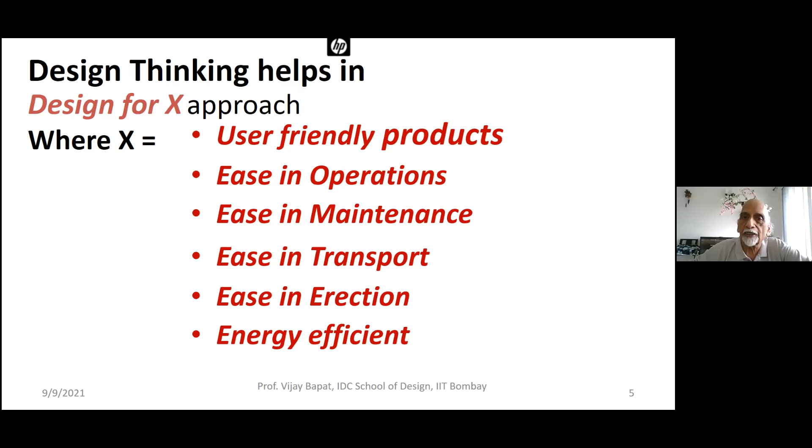So I look at the design thinking process as a very disciplined search for creative ways to do things better, different, and in more effective ways. We work on existing products or new products, but we try to make it better, different, and more effective. Only then is it innovation, and then it is patentable.

And why is it becoming so important today? Because of globalization. And another new trend is e-marketing. Now I can sit in any corner of the world with the click of a button. I can see products available in some remote village in Africa, and maybe with e-marketing I can even order that. It's possible today - the world has become a global village. We know what is available everywhere, and I can procure that also.

Now, I'm very proud that in recent years, the middle income group's earning is increasing. And what does that mean? There is some money available now for them after spending on roti, kapda, makan - the basic necessities - on things of desire. Now I would like to buy a better TV, better mobile, better car, better chappals, better clothing - everything, better. These are desires now, no more just necessities.

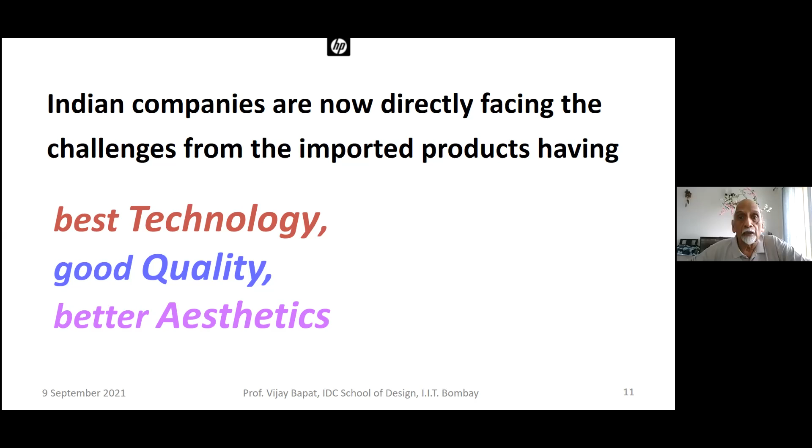India is fast emerging as one of the largest markets in the world. So what's happening actually? Indian companies are facing real challenges, new challenges. We are facing competition from imported products, which have the best technology, built with the best quality and even better aesthetics.

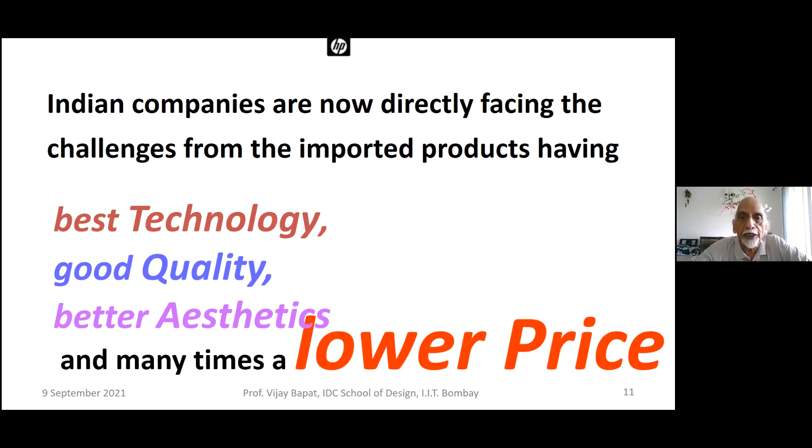So now we can actually make a statement that if another Mahatma starts another Swadeshi movement, it will not be effective because my Indian buyer is very intelligent now. He will say, okay, I have 100 rupees to offer for this product. Other companies are offering me all this added value, added characteristics. If you also offer it, definitely I will go for the Indian product.

Actually, another very interesting thing is happening. In 2019, our PM Narendra Modi envisioned that India will become a 5 trillion economy by our platinum jubilee. It's fantastic, and his dream is to make us a global powerhouse. So how can we achieve that? One important aspect is export of user-friendly products and services, which can play a very important role in achieving this dream.

Atmanirbhar Bharat, a very fantastic term he has started using in all his speeches. So we are saying we want to reduce imports and also increase exports. And that will be possible because at the central government level, they have identified almost 500,000 hectares of land for foreign companies. They are making many easier rules to do business.

Nine new ministries are in the pipeline to boost manufacturing, and one very interesting ministry is the Ministry for Innovation.

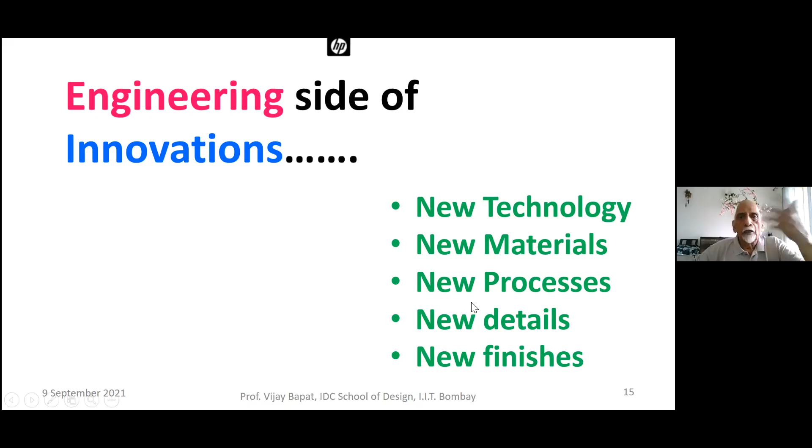Most of the time, the engineering side of innovation deals with new technologies, new materials, new processes, new details, which are important. But I also feel this will lead to very interesting new outcomes - we can reduce the cost, we can introduce new materials, new finishing.

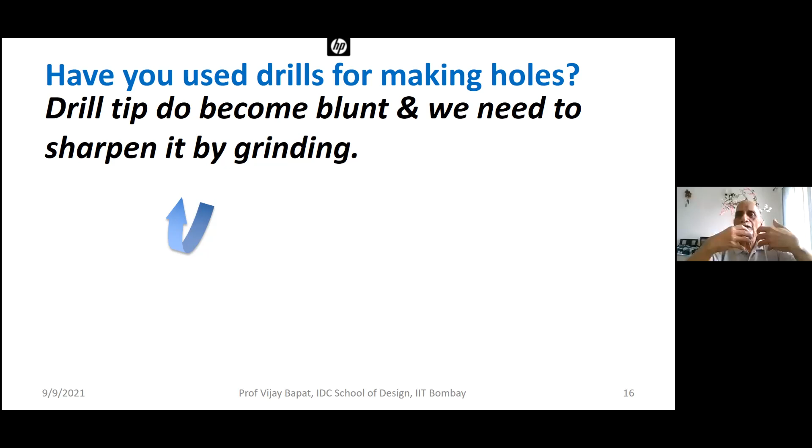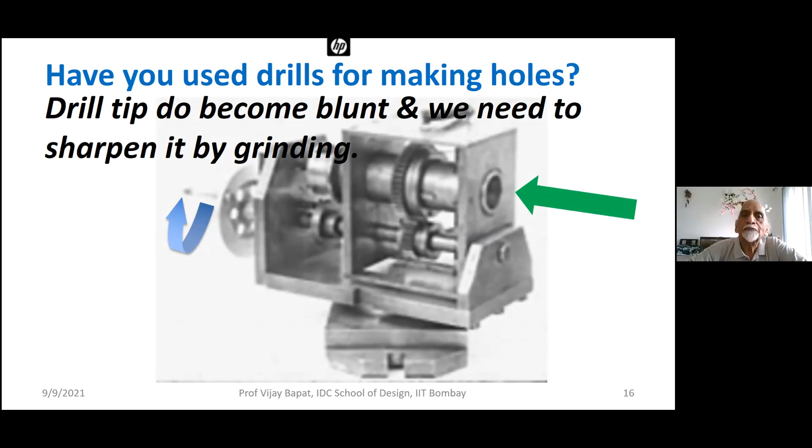We all must have used the twist drill for making holes in metal, wood, and all that. This drill tip does become blunt, so we need to grind it. So my mechanical friends designed a very interesting system where there is a gear system, a crank, and a morse taper where I can insert the drill and mount it on the pedestal grinder. As the angle is set, I just rotate the wheel and I get a perfectly sharpened drill tip.

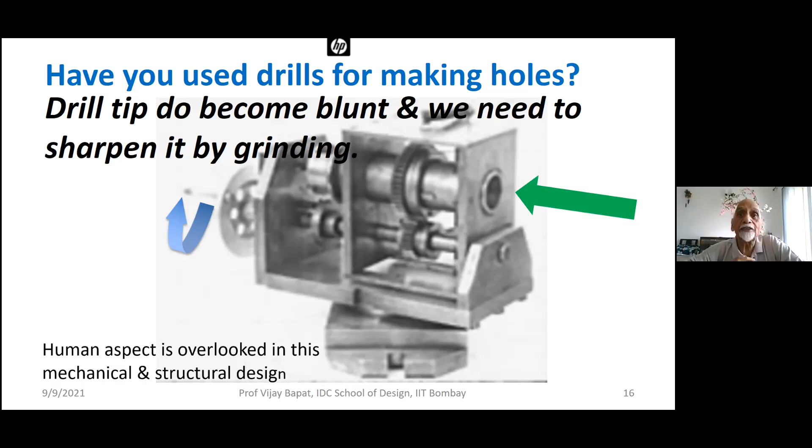Fantastic. But if you really ask me, this whole innovation is done overlooking the structural design and even the human aspect. Structural design means, is it really easy to assemble, easy to manufacture, and all those aspects. So it's a wonderful innovation, but I'm afraid it is not sellable in the market.

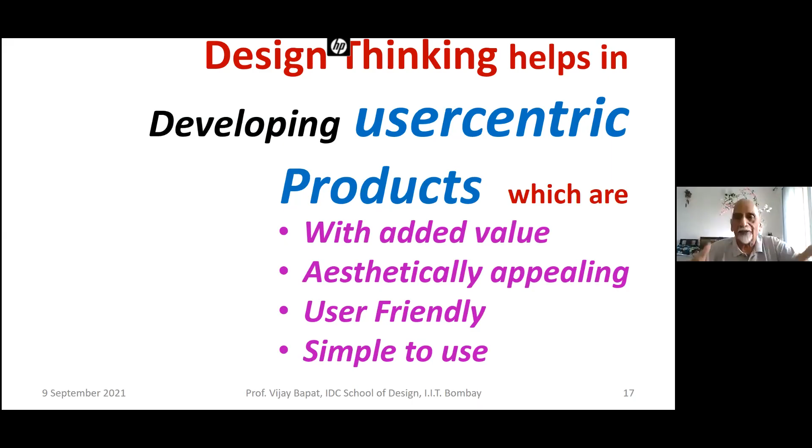Design thinking helps in developing user-centric products which have added value. They are aesthetically appealing, user-friendly. I don't need a very elaborate 100-page manual for that, and they are very simple to use, intuitive to use. You look at the product and you feel, yes, I can use it without really reading the manual.

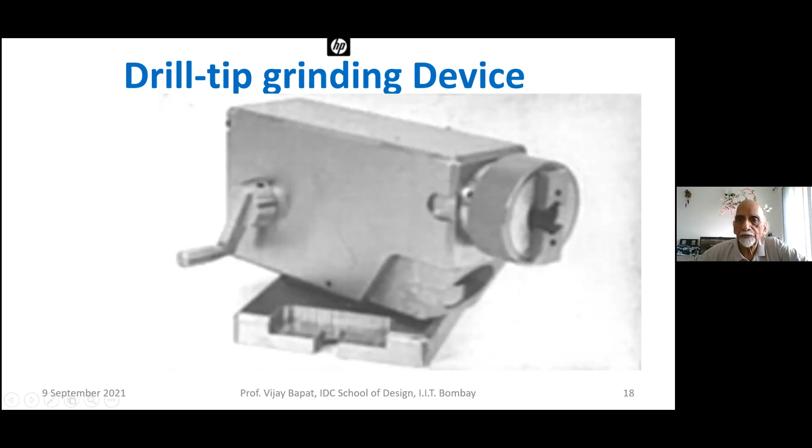So I'm referring to a coin, where technology and design - the user-centric aspect - are two sides of the coin. And we know that if both sides are not there, then it is like Badda Rupaya, and Amitabh Bachchan can use it only in Sholay. So to make the product successful, technology is equally important, and the user-centric approach is important. Our design thinking approach will help us develop products which will satisfy the user.

I'm taking very simple products which are available in the market, and I'm elaborating how design thinking has helped us develop better products. First, adhesive tape for medical application. Let me talk about the adhesive tape first.

We all use this cello tape. It's a wonderful product, and I can just cut a piece. But is it really user-friendly? No. There are many breakdowns or problems when we use it. We have to use either a cutter or scissors, and if it is without a dispenser in this form, you have to use your nail to locate the starting point.

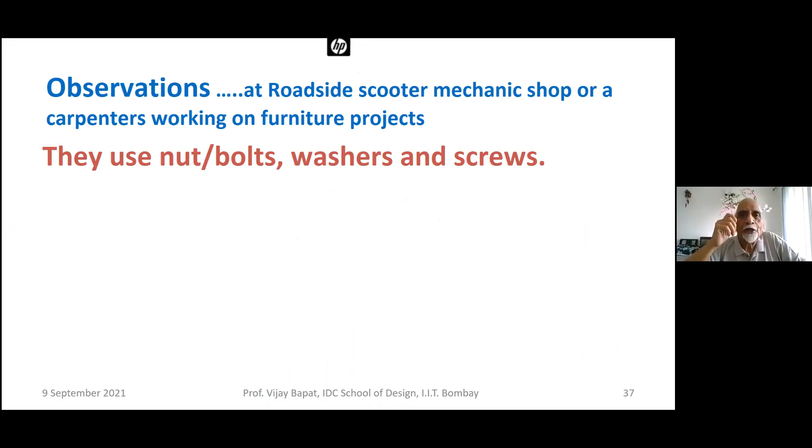Let me elaborate on the power of design thinking again with another example, presented in story form. I observed that roadside scooter mechanics or carpenters, when working on a furniture project, use nuts, bolts, washers and screws. We all know the washer is very important, but it looks designed for dropping. It is such a tiny product, very important in engineering function, but so tiny to handle. So my observation: they use a screwdriver with a magnetic tip to lift this dropped product.

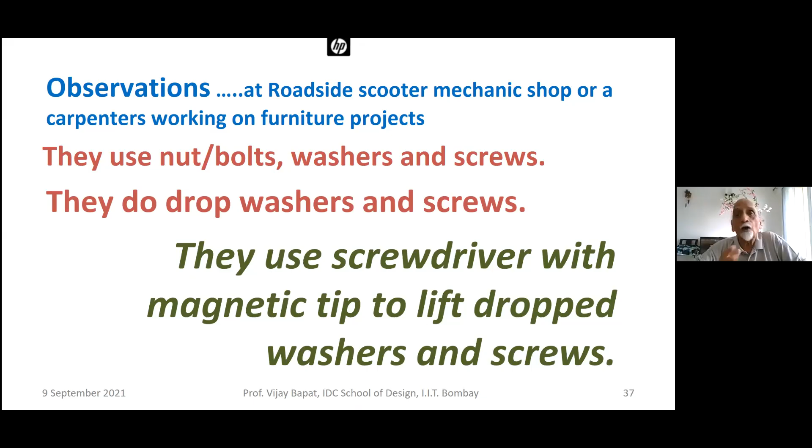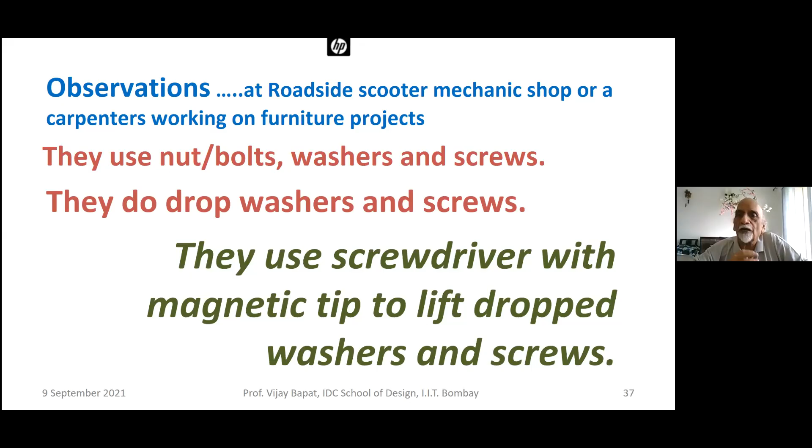We all know from 6th-7th standard that magnets attract ferrous things. Converting that principle, carpenters and mechanics have converted their screwdriver into a lifting device. Fantastic. But when you look at the magnetic tip screwdriver, it's not compact. It's not sellable as a product to other people. Maybe only carpenters, mechanics, or technical people will buy this, because it's not compact.

Now let me present another scenario. Say I'm an old man trying to open my door. Thanks to my lock manufacturers, the keyhole is always very tiny, so I struggle to insert my key. Thanks to my interior decorators and architect, the lamp or lighting always throws the shadow of my own body onto the keyhole, making my life more difficult.

If I'm really old, there might be onset of Parkinson's, my hands might be shaking, and I might drop the keys. With old age, there might also be problems with the back - I can't bend quickly. Can I develop some very compact product for this problem? Yes, I can. So I thought of developing a very compact product - like an innovation - I attached a permanent magnet on a thread.

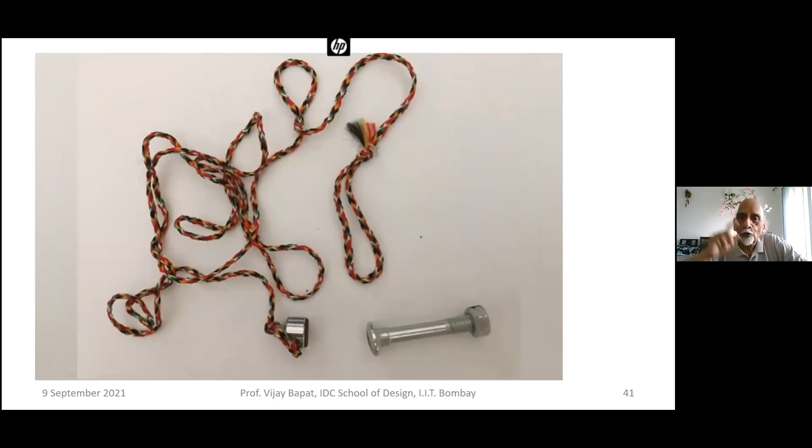I can carry it in my pocket and use it for lifting dropped keys or anything. Fantastic - now I have solved the problem for myself. This is my innovative device. I can wrap the thread, there is a loop, so I can hold it on my finger, put it on, and lift the dropped object or my keys. Fantastic.

But you agree it looks like a jugaad? My friend, do you agree? So this product is not really sellable. For the last 20 years or plus, I've tried to offer it on this type of platform and sell it, but nobody has offered me more than 5 rupees. Why? Because of that jugaad look - people feel why should I buy it from Professor Bapat. The IIT brand is not helping me market it.

So this product is a wonderful product, very compact, but there is a lack of human-centric design approach. It doesn't look like a value-added product - it looks like a jugaad.

Can you see I'm carrying one product in my pocket? This product is like having a clip, and it's nothing but a small, powerful magnet fixed on the tip of the aerial. Wow - doesn't design thinking lead to fantastic innovation? It's compact, carryable in my pocket, respectable to carry, and allows me to lift a dropped product. Very, very interesting product.

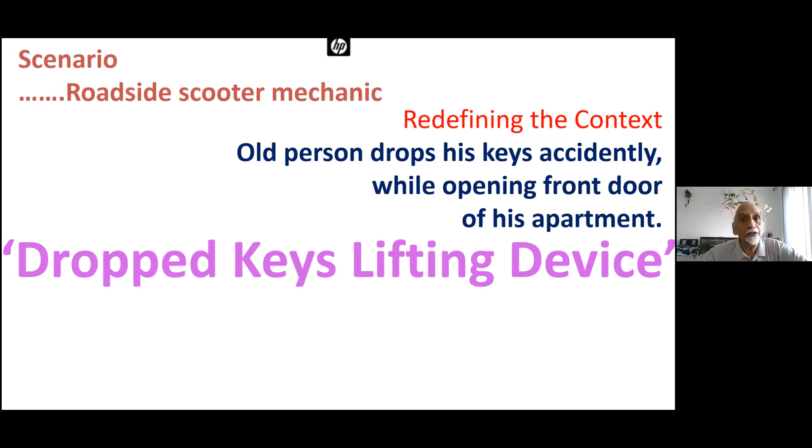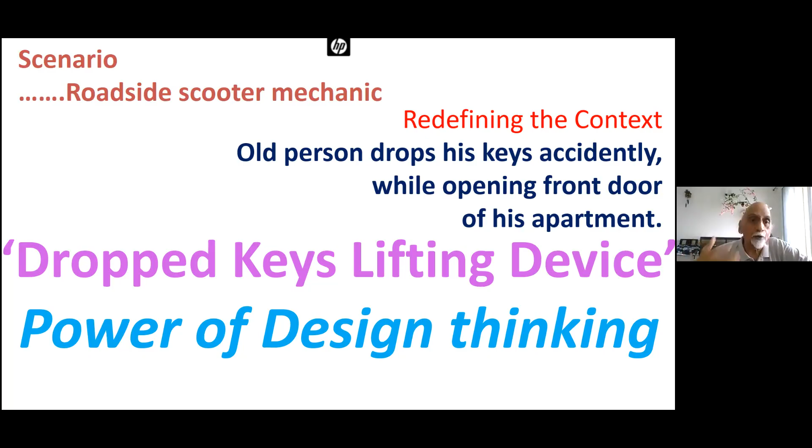In fact, I purchased this in a department store, particularly in the US, where there's a section for aged people, because demographically most Americans are older rather than young, while in India we have more young people. So maybe this product will not sell in India, but it's designed for the US market where countries have a larger older population.

Now we have started talking about user-centric design, which helps me develop fantastic products. Now I'm elaborating on the user. I'm user... you're bombarded with this, and design thinking, yes. Further, I'm going into details of user. They can be divided into 3 groups: primary, secondary, tertiary.

To explain this term better, I'm using the domestic mixer and grinder, a very typical product common today in our homes. Even in villages, now that power is there, people have started using this mixer and grinder because it makes life comfortable for wives doing very extensive cooking, whose life is drudgery otherwise.

If we have to manage the kitchen, my God, it's a real problem for me, all-day kitchen management. So who is the primary user? My wife. She uses the mixer and grinder for making chutney and all that.

Now, as I'm staying in Bombay, space is very expensive, almost starting at 50,000 plus per square foot. My kitchens are very small, I have a very small kitchen platform.

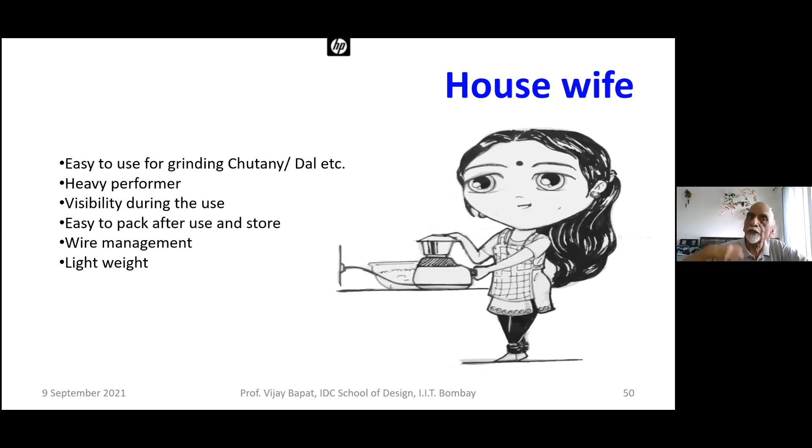So if my wife has used the grinder for making garlic chutney, she keeps the bowl for cleaning by my maid servant. So the maid servant is also a user now.

Okay, so what are her requirements? It should be very easy to dismantle the blades, easy to clean, with fewer parts. Why easy to dismantle the blades? Because below the cutting blades there are niches and crevices which are most difficult to clean. So the chutney jar, if it is to be cleaned, she has to open it up. In half a second she should do half a minute's work. Isn't it demanding? And maybe my maid servant is illiterate, and that's why she is a maid servant.

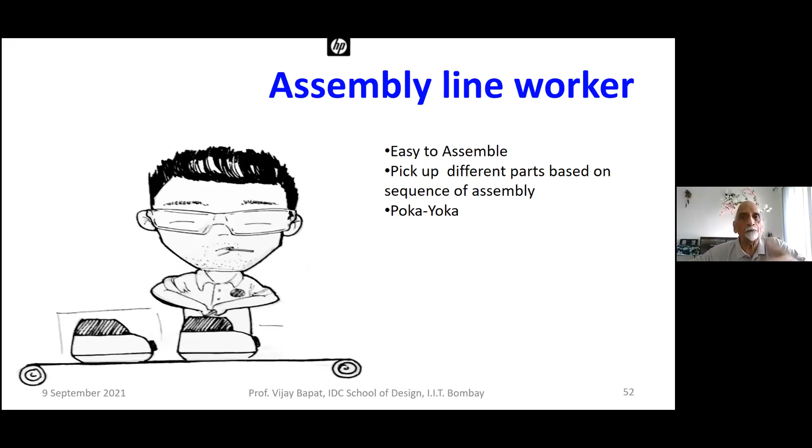Assembly line worker, him or her in the electronics industry - it's female dominated because they can do very repetitive, persistent, micro level jobs. Sometimes we use a microscope for assembly. It should be easy to assemble, pick up different parts based on sequence of assembly. Poka yoke, of course, in engineering teaching we talk about poka yoke, design for poka yoke, thanks to Japanese industry. So that every time a worker is assembling it, it's in the right way. All parts must be designed for the poka yoke principle.

Even in transportation, transport and workers, because in India we are still far away from automation, like loading and unloading trucks. It should be very easy to lift, pass on, and load in the truck. It should maximize loading in the vehicle. So size - if it's a 3-tonner LCV or a 10-tonner or a big container - that size becomes very important when I'm deciding the unit pack, or it helps me decide what should be the size of my mixer and grinder.

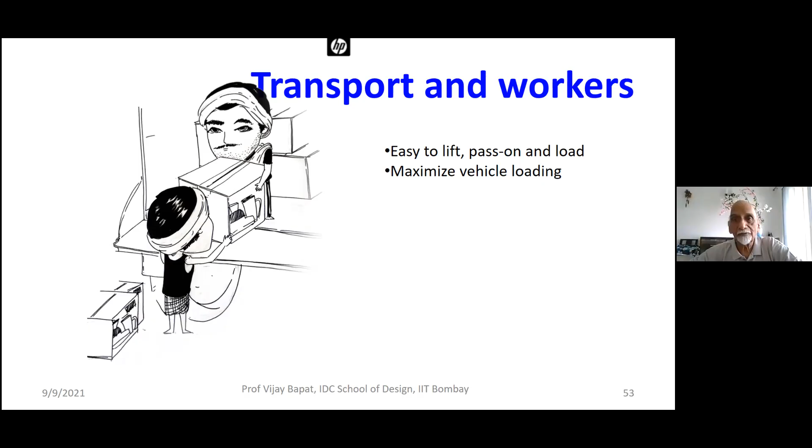All products - we don't believe in that Western approach of use and throw. So we like to maintain these. These are not small products - I am spending 3,000, 5,000 rupees for my mixer and grinder. So if it stops working, I'm going to either call a mechanic. Of course for bigger machines, white goods, the service mechanic will visit your home. For mixer and grinder, maybe I have to take it to the repair shop. But he is a user too - it should be very easy to diagnose the problem, easy to dismantle, easy to replace parts, easy to assemble.

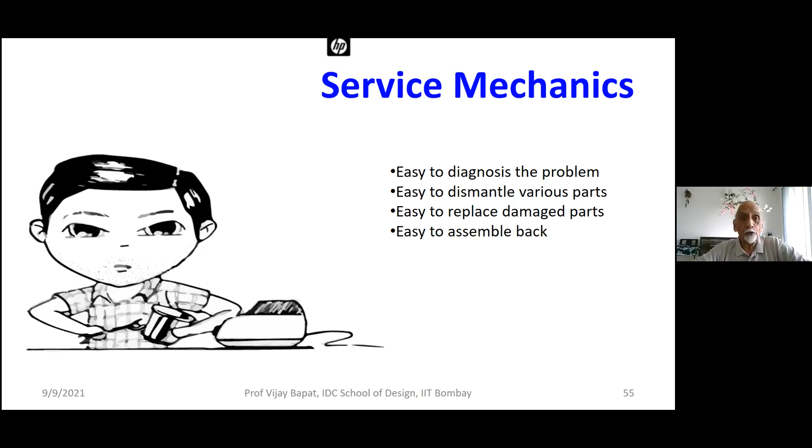Even to that extent, at the end of the product life - we Indians should actually be proud about this philosophy. We should not be ashamed of it, in today's green world of reducing carbon footprint and all that. The world is looking at India where this kabadiwala concept exists. I don't throw my old newspaper, I sell it to the kabadiwala. In turn he collects it and gives it for recycling. Fantastic. So even at the end of the life of the mixer and grinder, I'm going to sell it to the kabadiwala. Maybe he will offer 50 rupees, 100 rupees, whatever - he's the best judge to offer you money.

Now from his point of view, it should be very easy to dismantle, separate different parts based on material, because he would also like to separate the copper wire used in the winding of the motor, because copper can fetch real good value while the stamping is maybe only 10 rupees a kilo scrap value. Copper is about 300 rupees scrap value. He becomes my user and I have to design the product for him.

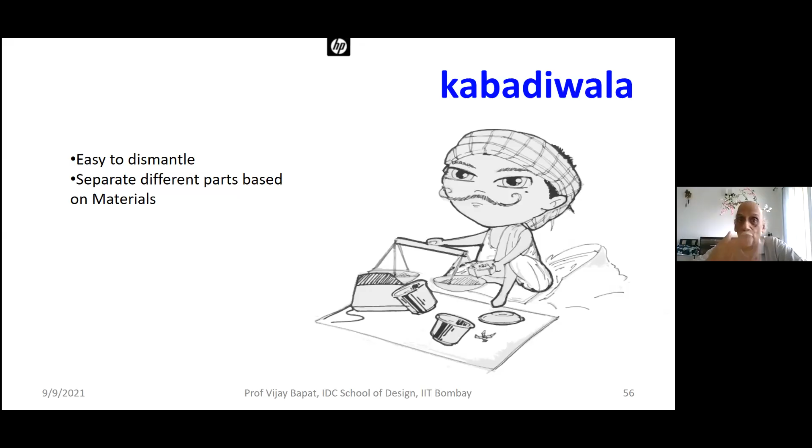Today the car manufacturers, the auto giants, have a design team working on new designs of a car, and there is an equally important group working on disassembly of cars. At the end of the life of a car, it should be very easy to disassemble. They are talking about automated disassembly and barcoding so that even ABS, styrene and PP - these plastics - can be separated. Automated machines can separate plastics, metals like aluminum and copper, and the kabadiwala too, because if we want to make our earth livable with green design and reducing carbon footprint, this becomes important. It's almost like a PLM approach - product life cycle management - and design thinking helps in this.

Designing from cradle to grave - I'm designing it from the user's point of view. All these users, when I say users are involved, design thinking is involved, then I start looking at different users. They are responsible at a cradle stage through to a grave stage.

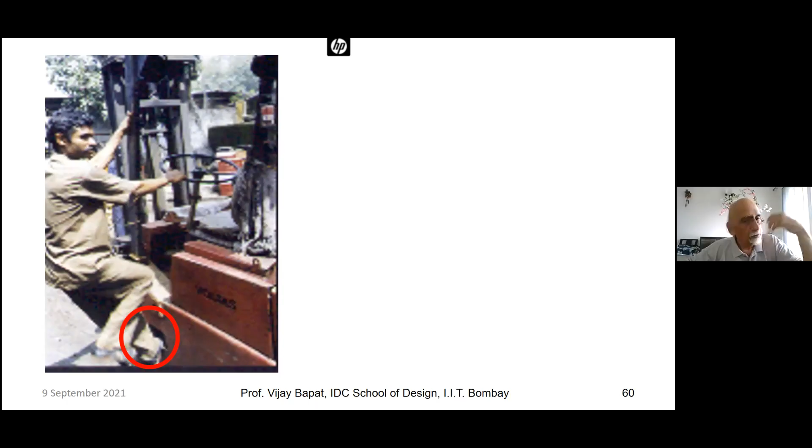And this driver is supposed to insert his toe—I'm referring to the toe part of the leg—into that step. You can very easily locate the step, insert the toe, and climb. Now on this forklift truck, there are no handles, so he uses the steering wheel and the basic forklift truck structure. Fantastic—he somehow manages to climb in. I'm using the term 'manages to climb in.'

Now he has to also climb down, and this is almost like a 90 centimeter, 3-feet-tall floor, and he has to jump.

When we talked to these drivers, they said they have to jump at least 20 to 30 times per day. Multiply that into 6 days a week, 52 weeks a year, and look at how many jumps per year they are making, jumping from 3 feet. These drivers are not athletes, they are not trained to jump.

Our spine and spinal cord is not designed for absorbing this type of jerk. The culprit, the crux of the problem for that backache, is this: almost every forklift truck driver was complaining within a year or so that backache starts. The problem is that small cutout in the sidewall. When he has to climb down, he's facing outward, and the step is not visible. Even if he manages the blind operation, the heel comes near the step. Can I insert the heel? No, it is designed for inserting the toe, not the heel.

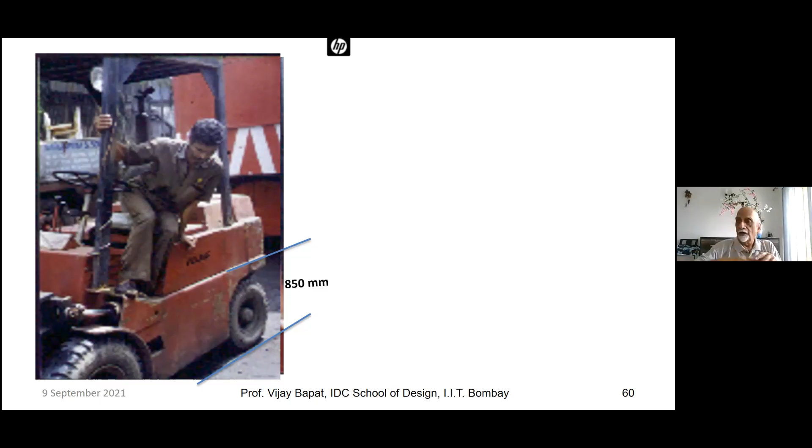So we said, this is the problem. We used design thinking as a process to solve it. How to solve this problem? We said we should create a step which is visible from the top, even when he is in the sitting position. So somehow we carved out a step.

We could reduce the distance from 850 to 450. Still it is tall, one can call it a tall step, but instead of jumping from 3 feet, this step can be used facing inward, and I can push my leg down just 1 foot, 40 centimeters, which is not impossible to get down from.

My drivers were really happy about this innovation, because after this we had to test its effectiveness, so we called some drivers. This is in IDC, we made a prototype, not a working mechanical prototype but a look-alike model, so a person could climb in and get down. We called some 10, 15 drivers and they said, fantastic, this is what is needed to get down. When he uses it every day for lifting heavy load, he has to get down 20 to 30 jumps, depending on what he is handling that day.

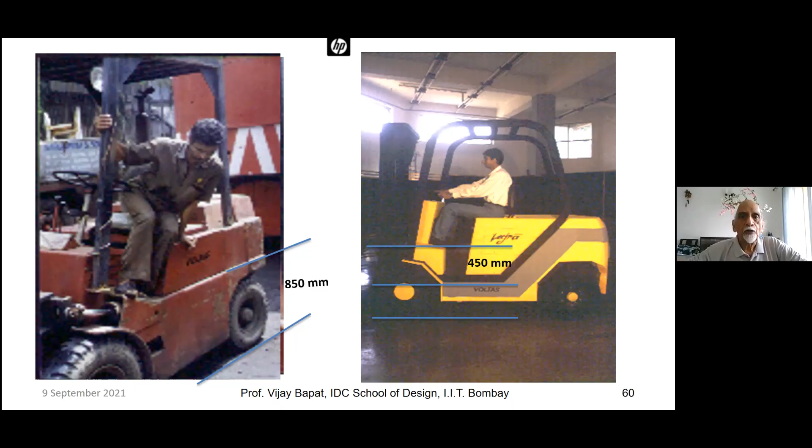As I was telling you, we spent 3 months understanding the existing design, where the user is even the assembly line worker, the service mechanic. We came out with 6 different chassis designs which can make their life comfortable and easy, easy to assemble, easy to maintain, easy to locate the problem.

But when we presented this to management, they said, sir, every design is fantastic, but it's like redesigning the whole truck, because we were proposing to change the basic chassis. These are concepts, not engineering designs, but design from the user's point of view, these are ideas. So they requested not to change the basic chassis, minimal changes only. Each design I could talk about for half an hour to elaborate why we developed it using design thinking. In some chassis designs there was less material and easier assembly, following that creative design approach.

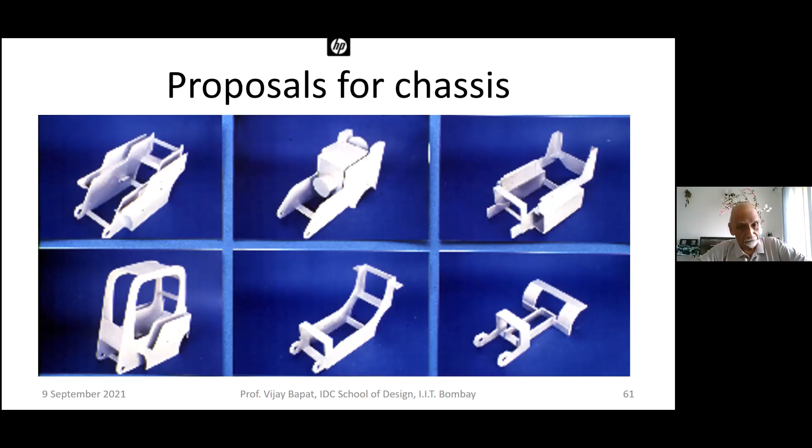So management requested minimal changes, it was like packing old wine in a new bottle. We accepted the challenge. We made those changes, and we made a full-scale thermocol model using 10mm, 20mm, 30mm thermocol sheets to explain to the assembly worker which plate and how the chassis is to be assembled. When they made the first modified chassis, they in fact used our thermocol model at the shop floor welding bay.

We designed it, our job was completed in '99. We submitted our proposal, and this whole model was shifted, this full-scale thermocol model built on their modified chassis. One of my designers was taken in by Voltas, and he worked on converting this into a working prototype. So it was tested, then there was a first engineering iteration and a second iteration. It was launched as the product Millennium in December 2000. It was a very proud moment for a designer, and even the Voltas R&D team, because it was looking great and really satisfying the need of a driver.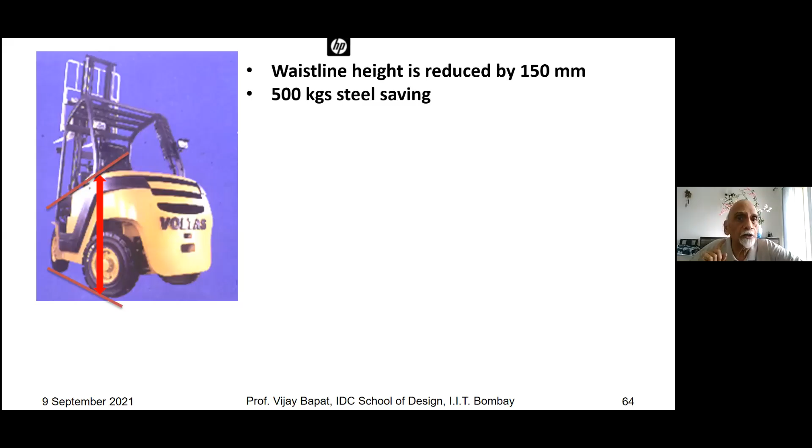It has now become lighter. Keeping the lifting capacity the same is important, so we manipulated a little on the balancing weight, but the lifting capacity remains the same. Still, the total saving on weight is 500 kg of steel.

Because now the basic load is less, dead weight is less, fuel efficiency has improved, speed has gone up, gradient performance improved, and this is becoming like a 5-star product. We all know AC, refrigerators and other electrical products - even in India we've started rating them, giving stars based on fuel efficiency and energy efficiency.

A 5-star rating gives you a really good energy efficient product, but you have to pay more, because it's like a saving per month in electricity for the lifetime of that product. Now if your dead weight is 500 kilo less, it's like using less diesel every month. So they started charging a premium on this - it is a 5-star rated product, one can call it.

They started exporting it. Actually, this division was in red, meaning they were not really making good profit because of the competition. But in one and a half years, because of export and increase in demand...

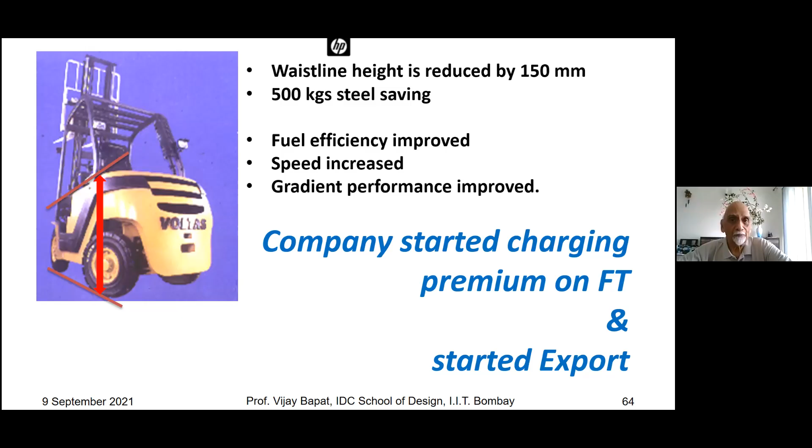I worked on another product, the cooler pump. Let me explain what this cooler pump is. Of course, in Bombay or similar climates near the seashore where humidity is high, desert coolers are useless, they don't work. But in many parts of India, like Rajasthan, Nagpur, Delhi and Haryana, it is dry climate away from the seashore, and desert coolers are very common.

Now, what we do in a desert cooler - it is 1/3 the cost compared to an air conditioner, where we use a compressor and freon gases, refrigerant gases.

Desert coolers have a small tank of water that we fill up. There is a small pump - when I switch on the desert cooler, this pump lifts the water and throws it on the pad, which we call the evaporation pad. There is a big blower behind that blows hot room temperature air. We normally put it near a window, so hot air comes in, the water evaporates, and that evaporation reduces the temperature so I get cold air. Fantastic product at 1/3 the cost.

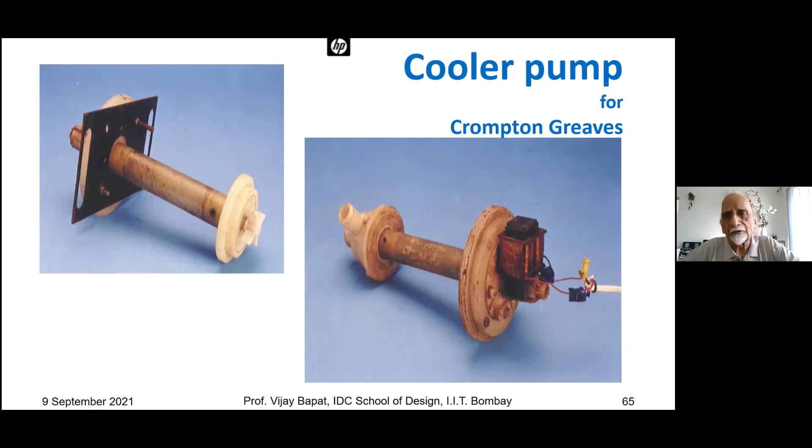So they presented, and we were happy because it is energy efficient. Compared to the induction motor, they had reduced the components by about 5 or 10%. Both of us said yes, fantastic research and innovation. Nori, our VP at that time, asked me, Professor Bapat, now from user point of view, design point of view, what is your comment? Using design thinking principle, I said, sir, fantastic, technically it is superb, but why is this designed like a 100 HP motor?

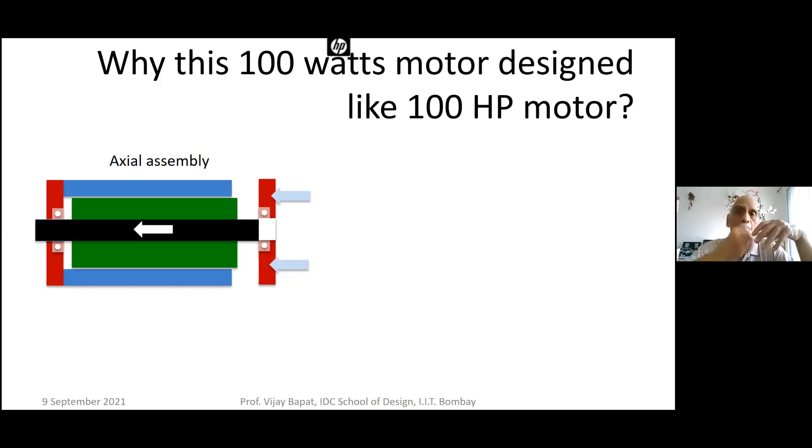Normally these bigger motors use axial assembly - there is a stator, blue indicates the stator, an end plate, a bearing, then I put the rotor in, then another end cap or cover. That's how axial assembly of a motor is done. I'm not showing the electrical thing, but mechanically the assembly is something like that. So I said, why is this 100-watt motor, a very tiny motor, designed like a 100 HP motor? He asked, can you elaborate? I said... and this was the sketch drawn during that meeting.

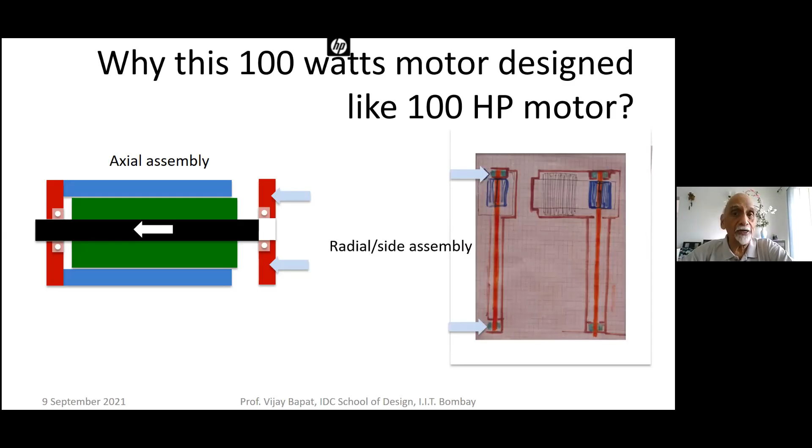I said, can we develop a motor based on radial or side assembly instead? They gave me the challenge - they said, with 3 months before launch, can you develop this product in 3 weeks? A challenge. We accepted it, and I came out with a working prototype.

This prototype was built using polycarbonate material because the motor ran at very high temperature, around 103 to 108 degrees centigrade, and polycarbonate can withstand that. Because of my knowledge in plastics, I developed this in polycarbonate as the first working, hand-fabricated rotor, because even 3D printing technology wasn't available then, or was not capable of using polycarbonate. Actually, I was instrumental in starting the rapid prototyping facility in IDC in '98, so I'm aware of 3D printing - we used to call it RP, rapid prototyping. But even that was not capable of making it in polycarbonate, so it was hand fabricated. We tested this.

Again, all design innovations are based on the requirement of the user or the requirement of different desert coolers. The mounting plate changes - different desert cooler manufacturers have different specifications for the mounting plate. This allows the basic pump structure to stay the same, and I can snap on the mounting plate depending on what's needed. It can be like this, or like this, with any other dimension and any other screw holes.

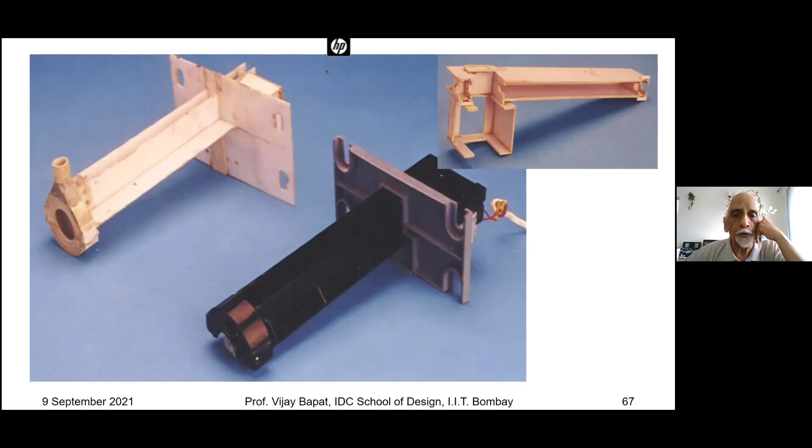Now look at what we could achieve. Components were reduced from 34 - in their new permanent magnet motor design, components were 34. We reduced it to 19 because there are no screws. It's a plastic injection body with no screws - assembly is based on snap-on.

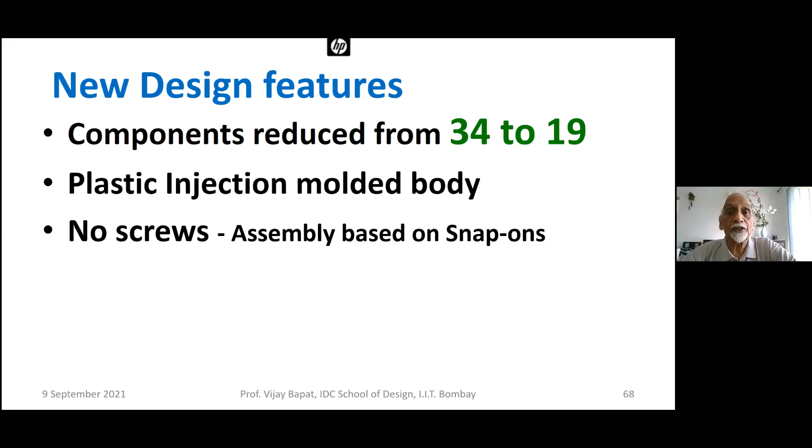Assembly time is reduced almost by 40 to 50% because it can be done as parallel assembly. You assemble the magnet on a shaft, that's the rotor, and your stator assembly is winding and stamping, and all that. Third is bringing them together in plastic.

We introduced another very innovative detail: the cover acts as a heat sink. Most of the time, in our common motors, the covers are just a protective cover, safety against rodents and cockroaches getting in, and so the human being doesn't insert a finger and get hurt or shocked. While my cover not only protects the electrical thing, it acts as a heat sink.

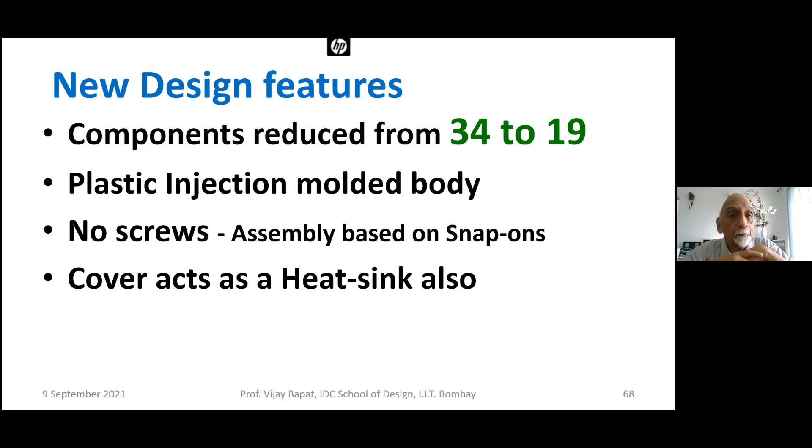Design thinking can help you improve each and every aspect. Why use screws? Screws have to be lifted, I must have a pneumatic screwdriver, insert it in the proper hole, then drive and snap it on. Instead, just bring the parts together and snap.

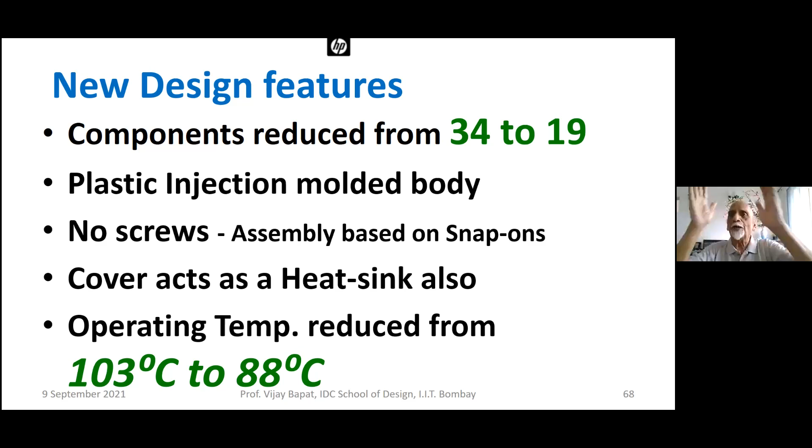And these were my first patents. Design thinking helped us improve so many features, and this is innovation.

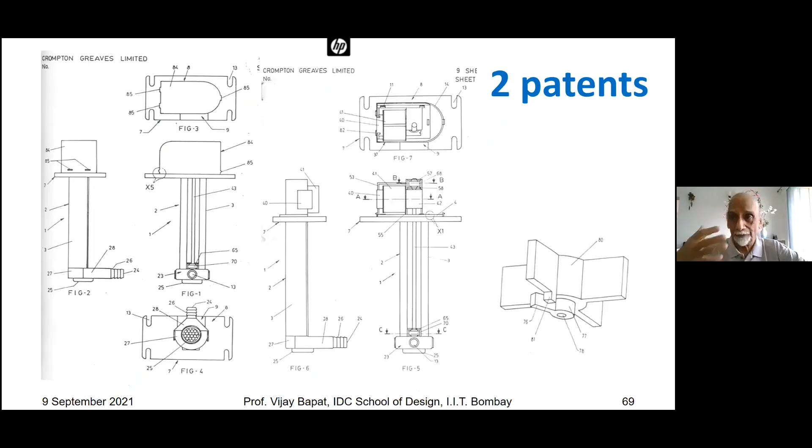Third case study I would like to share: Electronics Devices, a medium scale industry from Bombay. They work with foil sealing machines. Electronic Devices, ED, is their name.

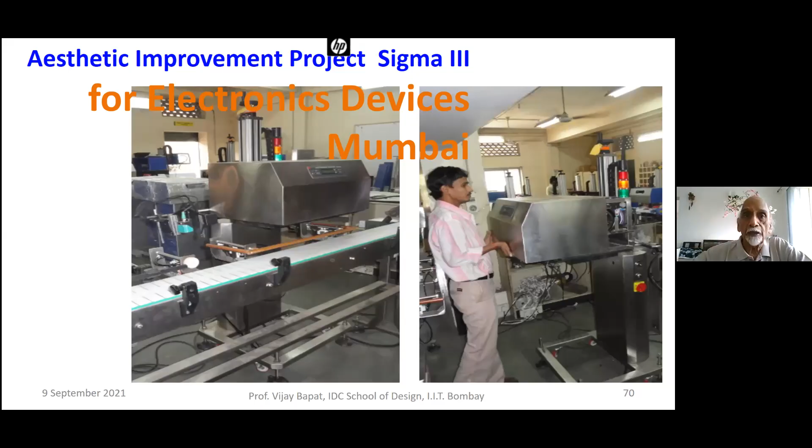They were working on a futuristic model they called Sigma 3, which even had a self-diagnostic module and all that. They approached me and said, sir, our current model looks like this, we want to develop a futuristic model because we are exporting. Even this model is selling, they were exporting it to Europe and even to the States. Let me elaborate. This is a foil sealing machine.

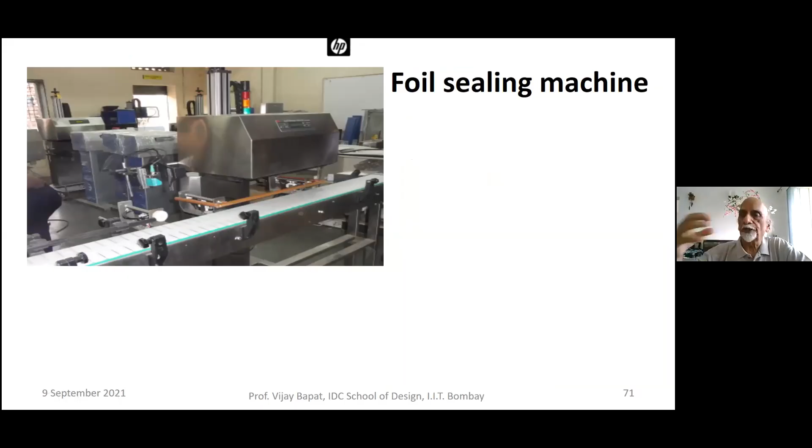What does that mean? There is a conveyor belt, which creates an induction field, a very powerful induction field. Where is it used? We all see bottles, like a Nescafe bottle, a pickle bottle, or medical bottles. When we open it, we see there is a foil.

This foil has two important roles to play. It protects the inside content. Nescafe or instant coffee is very hygroscopic, some of my medical tablets can become soggy, and we don't know how many months it will remain on the shelf, we call it shelf life. Once I buy it, I have to open the seal. This is the seal, so it keeps the internal component fresh.

Also, it gives me the confidence that this is not pilfered, nobody has opened my instant coffee and used a spoon of that coffee powder, nobody has opened my pickle bottle and used pickle for his lunch. That confidence, we call it pilfer proof or pilfer evident. If somebody opens it, it is visible. So they always say, if the bottle's seal inside is not intact, return the bottle.

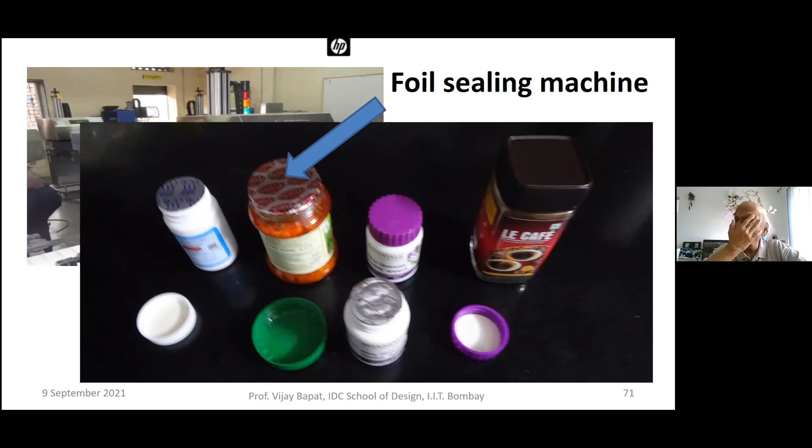So best thing is, for expensive products, when you are buying, open the bottle cap and see that the seal is intact. That's how the whole thing works.

When the company approached us, we said, okay, we have to visit the manufacturing sites where this machine is used. We visited pharma companies, and even one pickle manufacturing company, and in a nutshell, it's like a continuous line of conveyor belt.

So there is a filling station, there is a capping station. At the capping station, the cap is inserted and rotated. Everything is automated, almost 40 bottles per minute is the capacity of this machine, which is a foil sealing machine. It can be increased if needed, but this particular machine can accommodate that small bottle at 40 bottles per minute.

At the filling station, in a pharma industry, it may be a 1 million tablet manufacturing place. I have designed for a pharma company a machine capable of handling 1 million tablets, like Crocin. Then it comes to the filling station, and those are filled in bottles. Of course, glass bottles are for some medicines, otherwise I'm using blister packing, that's another machine.

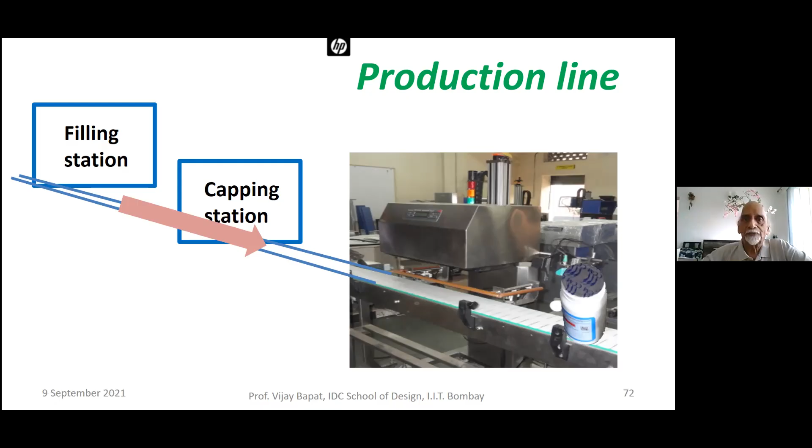Now, design thinking - who is the user? The operator. So he has to rotate that top knob to adjust the machine height, because that is needed for adjustment depending on the height of your bottle. So it adjusts the gap between the conveyor belt and the machine.

We even discussed this with the electronic fellow and everybody involved in designing this. I'm not an expert in electronics, but I talked with the electronic design team about why each component was placed where it was. When I started looking at this, most of the time when they're doing the circuitry, they place components in a way that makes it easy to draw the circuitry to make the PCB board, following how current flows.

So that is how they normally place the components. I said I would like to shift all the tall components towards the back, not in the front, but the far side. They said yes, that will involve a lot of rework electronically. Management asked, why sir, do you want to change that? I said I want to come out with a different look - I will elaborate on the logic.

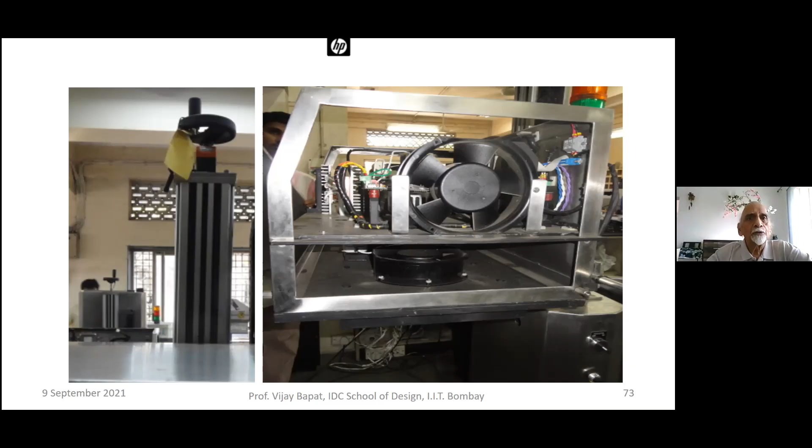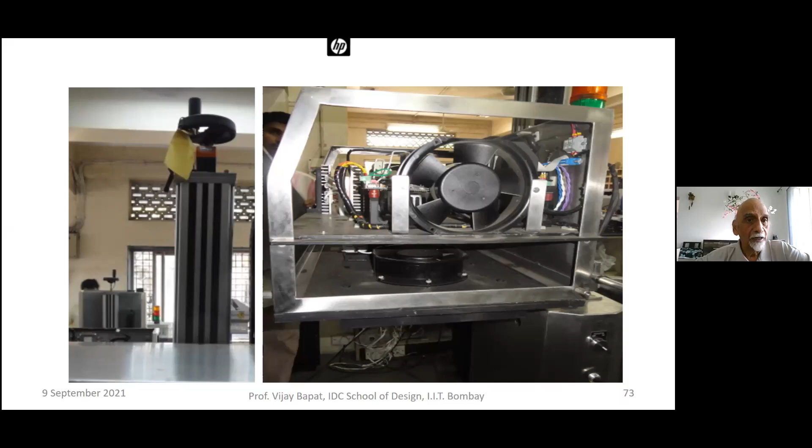So the electronic and electrical teams started reworking on relocating the components. I even looked at the cooling aspect, the assembly aspect - why this L-frame? So I spent time in the manufacturing bay, looking at how it is assembled, how it is welded, why it is designed like that - all those questions.

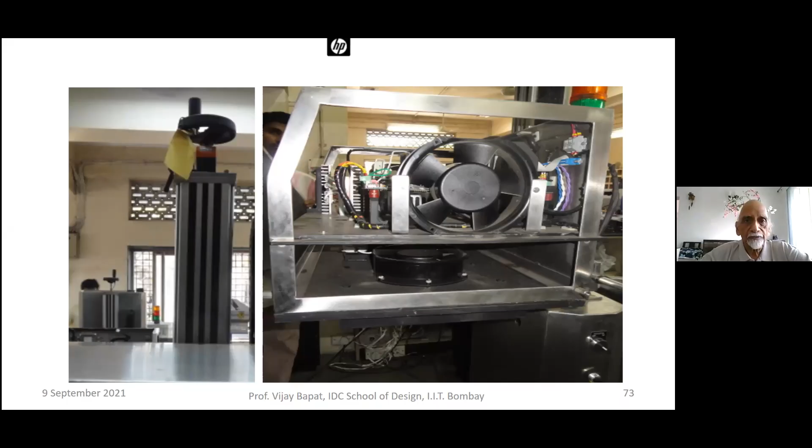This is designed in such a way that it's a call for an accident. Now why is this so important? Because with design thinking, I could visualize what will happen if somebody accidentally tips this cup and there is a last sip of tea or water left in it. It's going to fall and flow into the electronic circuit - and very heavy current is flowing there to create the induction field.

This machine will stop. And in the pharma industry - that 1 million tablet press, ACG Pharma, you can check their website, I have designed their 1 million tablet press - we'd have to stop it because I can't store that production. After production, I must have a filling station and a sealing station. It's like continuous real-time working.

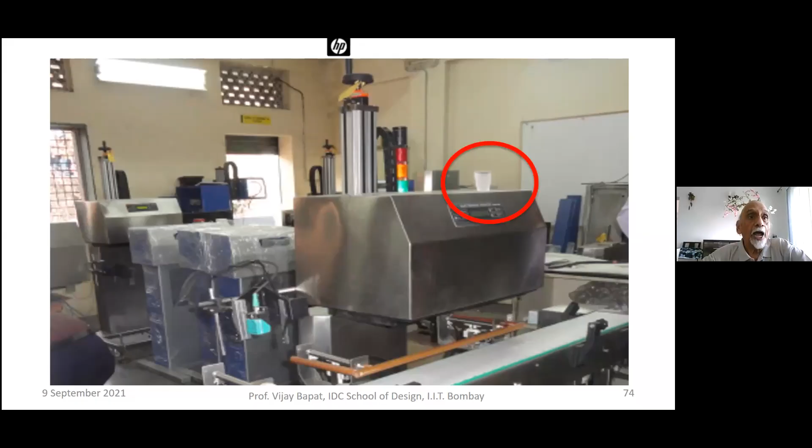So when we visit the actual site, we keep our eyes wide open and try to capture this type of accident-prone area. These are designed for accidents, right? Yes. So I said, new shapes.

And because it is sloping forward, I requested my colleagues from the electrical and electronic group to design all the taller components to be in the last row, while all the smaller components like ICs should be in the front row. It's like army people standing in a very disciplined manner - tall people in the last rows, shorter people in the front row, sloping forward.

I came out with a better shape. Of course, it was a bit expensive to produce that depression in the front, so we simplified it, but kept that sloping forward form with almost the same basic concept - we took it into production. Another major issue - this picture, I call it the million dollar shot for a designer.

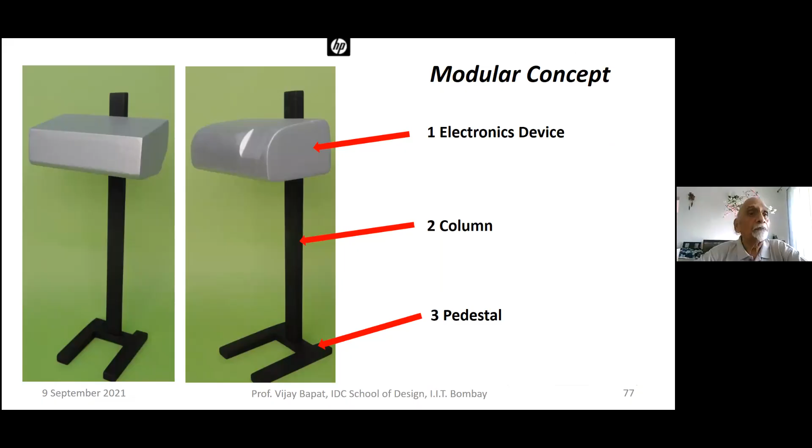I came out with a modular concept where the electronic device is separated, the column is separate, the pedestal is separate. We are now using corrugated boxes to pack them up—three packages going together for one machine, and now I can airlift it.

So when you take out the basic electronic unit, it is wrapped in polythene foam and paper to make it waterproof, since I'm using corrugated paper. This is how you remove them—it's so designed now that a single person can do it.

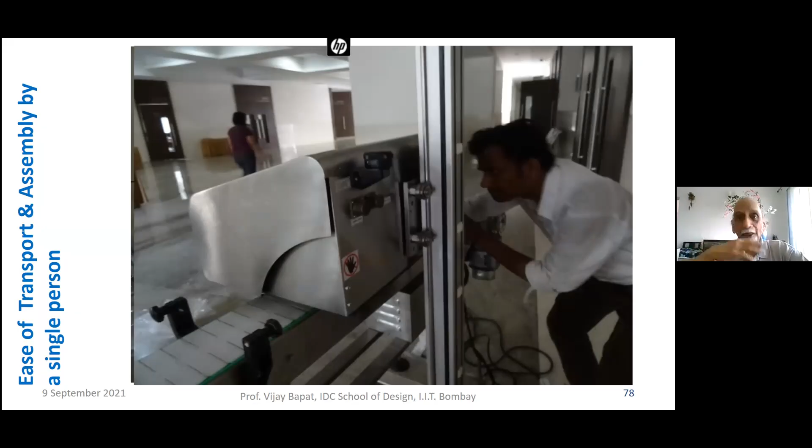The whole assembly is made simple, and a single person can assemble it on site with minimal instruction. So it looks like this—another view. We have reduced that frontal depression because that was a bit costly.

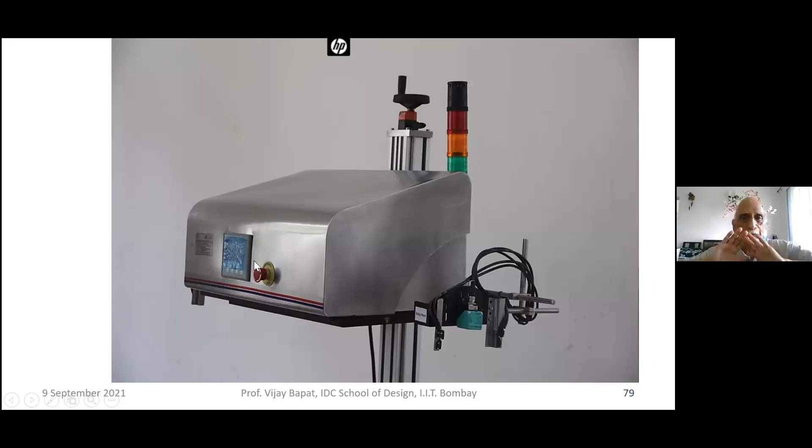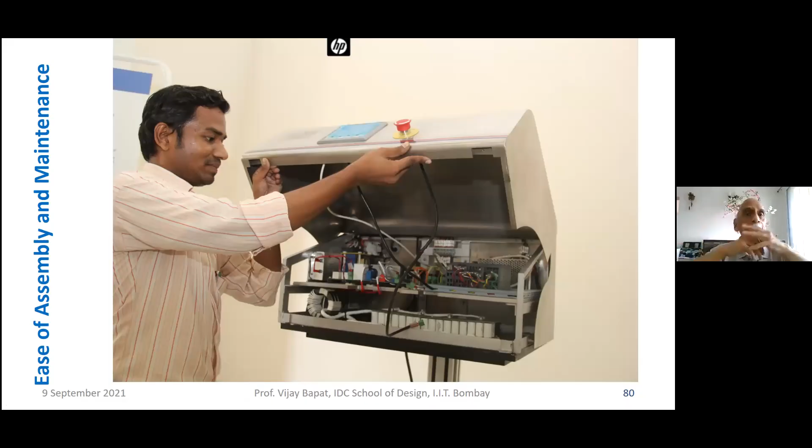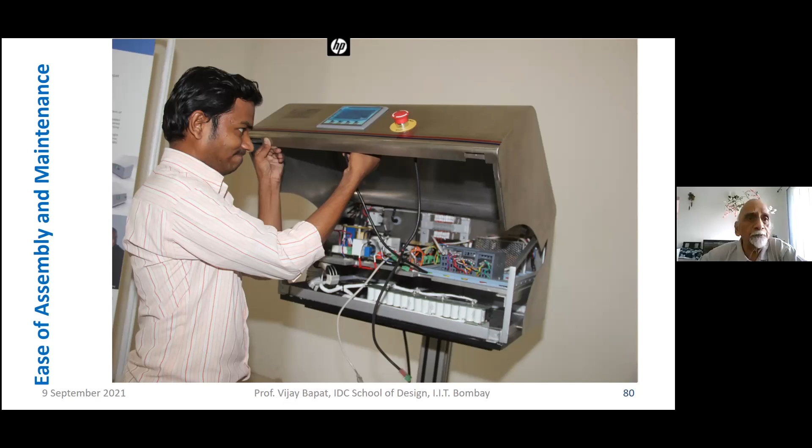My service mechanic—since this is an electronic product, maybe something will go wrong, so it should be very easy to maintain. He is my user: remove two screws and it becomes openable. Then he removes the connectors to the display and the main power switch, and the whole cover can be lifted.

Now the whole electronic system is in front of you, using a multimeter, and an electronic maintenance expert can check what has gone wrong. This comes with self-diagnostics, and we even introduced areas with shortest life as replaceable, plug-and-play modules.

Sitting in Bombay, we can keep track of diagnostics and the life of a machine working in New York or Germany or anywhere—it's an IoT-ready machine. So we can send the replacement part across before it stops working.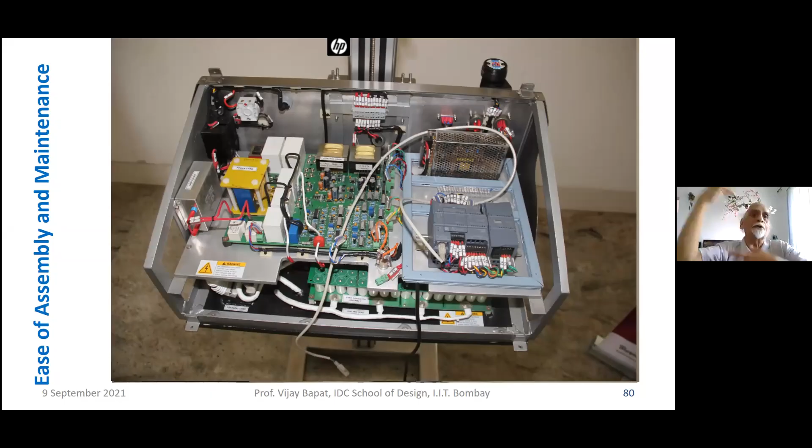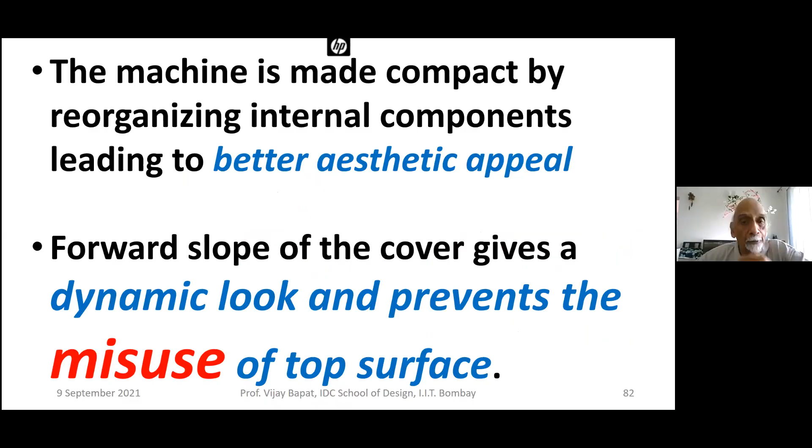Now what we could achieve—of course it's easier, better looking, user friendly and all that. But look: the machine is made compact by reorganizing the internals. It has better aesthetics; the forward slope gives a dynamic look and prevents misuse of the top—nobody can leave a paper cup or paper gun on it.

Look at how much weight reduction—almost 42% weight reduction, like 500 kgs in my Voltas forklift truck. Component reduction, assembly time reduction in the cooler pump, weight reduction in the foil sealing machine.

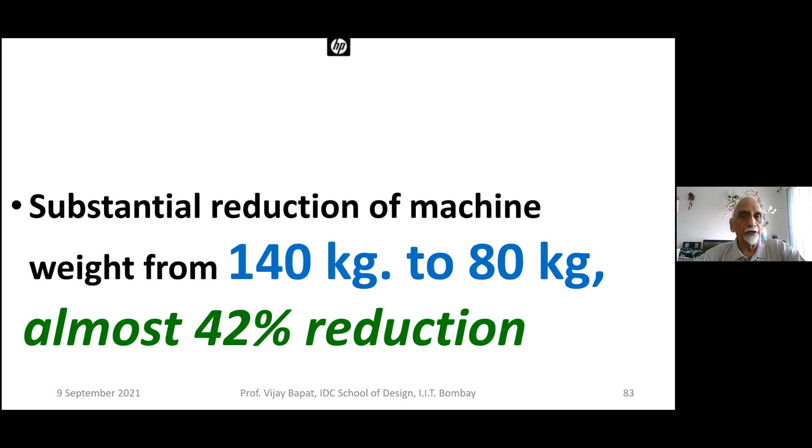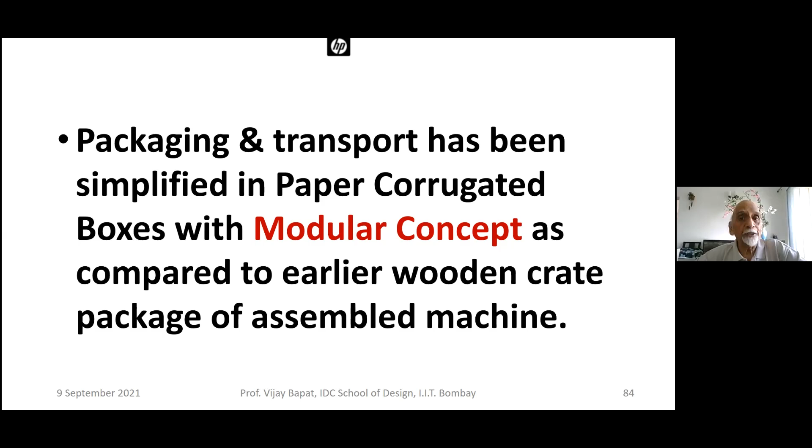Now I'm no longer using wooden crates. With the modular concept, packaging is easy with paper, and because of weight reduction and corrugated paper boxes, my transportation cost dropped from $1,250 to $300 FOB New York.

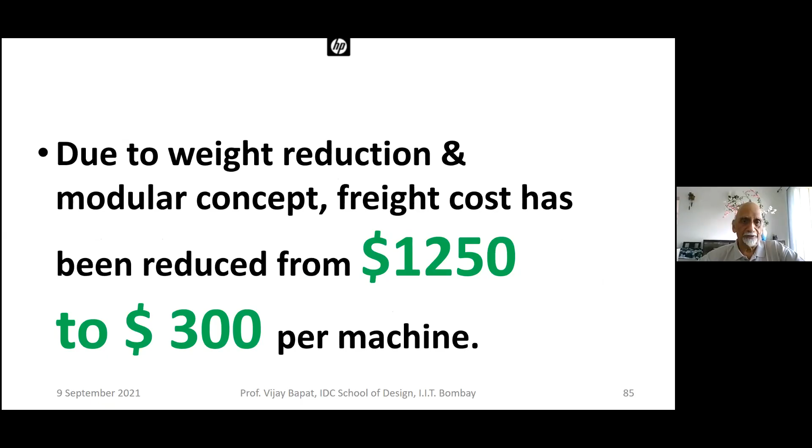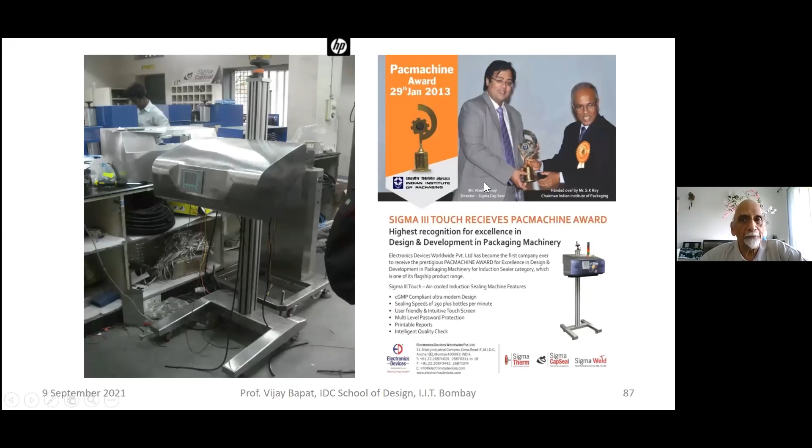My client was more than happy when they presented it for competition and received the Pacmachine award. This is the machine's first prototype and the owner receiving that Pacmachine award. This was even displayed at Hanover and all that.

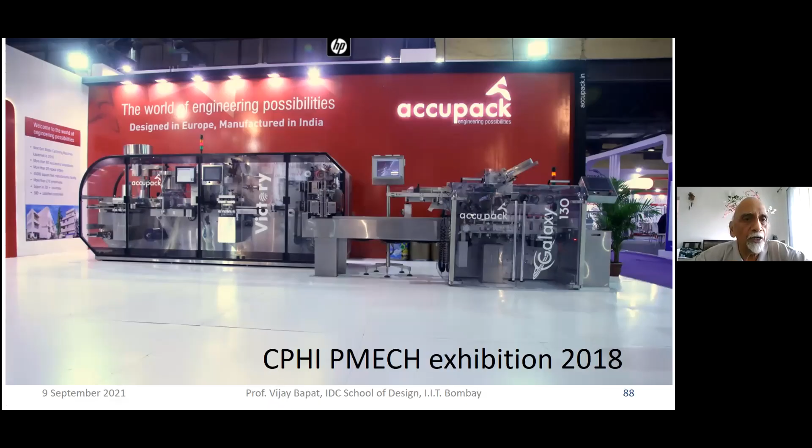Another quick case study - one more machine I developed for Accupack. It is a blister packing machine. Pharma tablets, like Crocin and all that, come in the blister - you just break open the foil and take the tablet out. So they have used the tagline 'designed in Europe.'

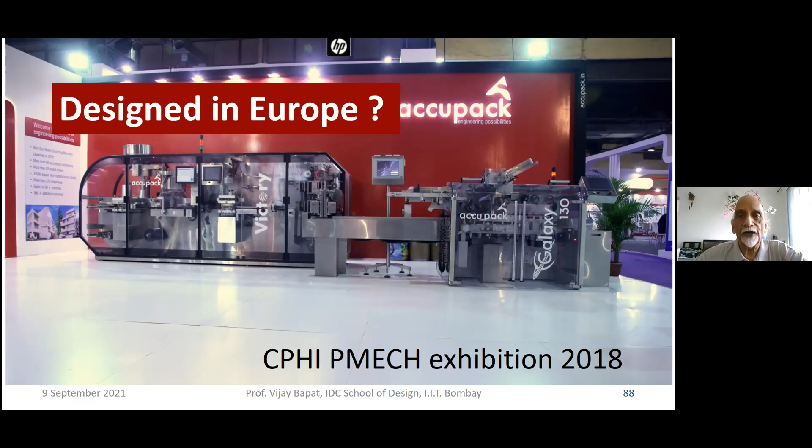There are two machines - one is the blister pack machine and another is the cartoning machine, because all those blister pack tablets must be inserted into a 3, 5, or 10 package carton. So the other one is the cartoning machine. So which one do you think is designed in Europe? Of course I'm not getting feedback in this online session, but people usually say the machine on the left. In fact, this machine was designed by an Italian firm.

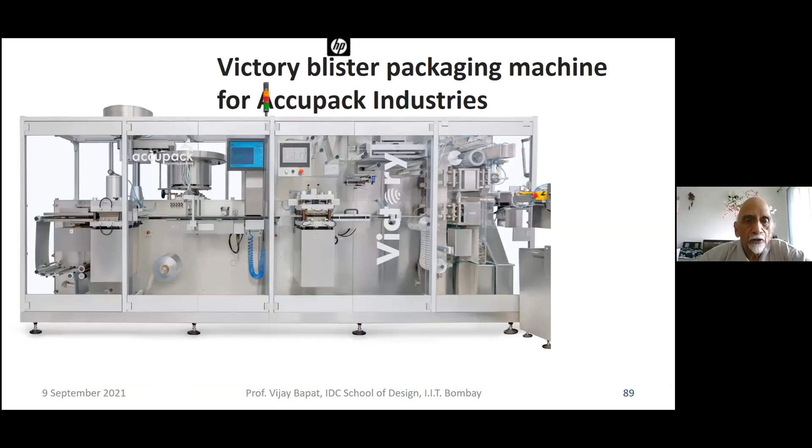This was their machine before I redesigned it. Now it looks like there is value-addedness because of the form. We reduced and made it really look good, with some reduction in cost. But the most important contribution is it looks very precise as a machine. Look at that, look at this. At one display in one exhibition, they booked orders sufficient to keep them engaged for 3 years.

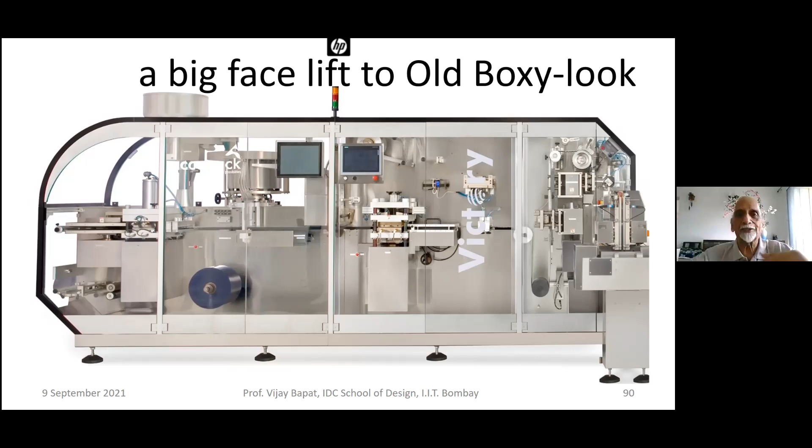Design thinking has helped me to deliver. I call this approach 'imagineering.' Of course, this term is not coined by me - it's from Alcoa, the giant aluminum manufacturing company in America. Imagineering - it's not only imagination, it's not only engineering, you have to combine them together. This is the key for innovation. Innovation is successful when the product is accepted by the user.

So you are on the voyage of a very challenging voyage of innovation and design thinking. That road is like a road to the future. Shubhaste Panthana - thank you very much.